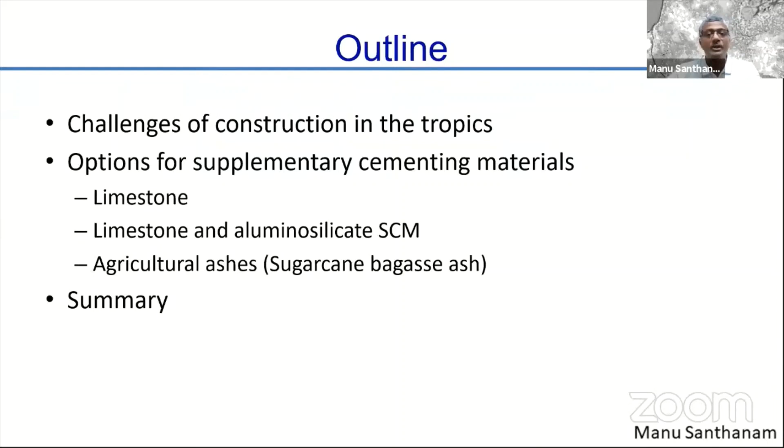The topic for my talk today is future cement solutions for tropical climatic conditions. I'll first talk about the challenges for construction in the tropics, and then focus specifically on supplementary materials that we intend to use to demonstrate how we can effectively utilize available quantities of materials to produce sustainable concrete. Then I'll summarize with key points, since much of the problems are quite similar in India as we have in Africa.

So what are the challenges of construction in the tropics? First and foremost, we are doing construction in very difficult conditions. Most of our countries have high heat and humidity, which pushes up the problems of concreting and also the rate of chemical deterioration.

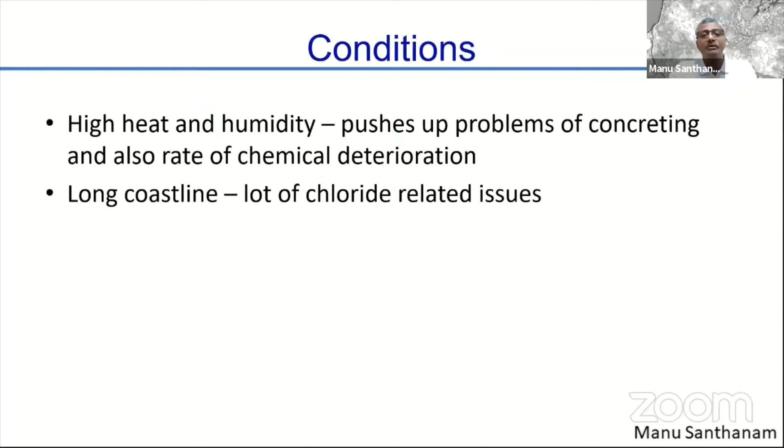We have problems during the concreting process itself, giving us challenges to produce good durable structures. Also, if we have an aggressive environment, the rates of deterioration increase because of this heat and humidity. We also have a long coastline to deal with, resulting in chloride-related issues that dominate the behavior of structures exposed to different service environments.

In terms of materials, there is generally a reluctance to move to blended cementitious systems. We've been doing seminars all across the country for the last 20 years or so, and I have not really seen the same kind of change in mindset that should come after hearing so many people talk about the benefits of blended cements. I believe it's quite similar elsewhere in the world also - not just Africa and India, but in a lot of countries there is reluctance to move to blended cementitious systems.

There is a major problem with the specifications used for construction projects, which are outdated. These are primarily outdated because they don't take into account the advances that have happened in construction materials over the years. There are also quality and consistency issues with site materials, because we don't always succeed in giving very large quantities of consistently good construction products at all job sites.

One of the major issues is that nobody really pays attention to concrete design. If you go to any major construction project, comparing the time taken for design versus construction, very little time is actually spent looking at the concrete mixture to be used, what problems can be envisaged, and how to solve these problems in the real life project.

Unfortunately, more than 90% of site-related problems are because of concrete itself. So if you don't spend enough time to look at the concrete and design it appropriately for a given situation, you're most likely to land up in problems.

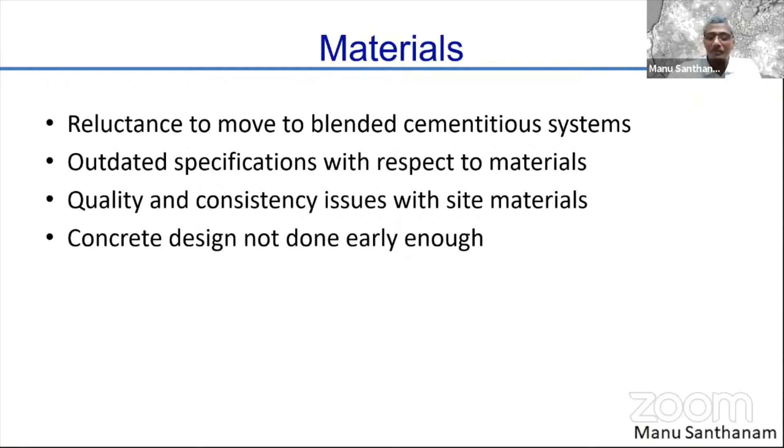As far as construction technology is concerned - I talk about India, but I'm quite sure this is similar in Africa - we have a major lack of skilled workers. We always have this feeling that concrete is an easy material to work with. We leave it to the last line of defense, the last laborer who's actually putting this together, to decide the fate of our concrete.

What's the point of putting together a cover of 75 millimeters in an extreme environment, and then actually you're getting only 7.5 millimeters on site because people have not really paid attention to it? So there are major problems with respect to understanding or giving respect to concrete as a construction material on the job site.

One of the other problems is water addition on the site, which is rampant - it happens all over the place. Even in very high profile construction projects, I've seen instances of poor cube strengths coming out primarily because water was added to the concrete.

Quality checks on sites are quite infrequent. Most often the quality checks are left to foremen and people who don't really understand how concrete should be done and how concrete should be cured.

There is over-reliance on plain cement - all over India, that's a primary problem we have. We can't change the mindset of people to move away from plain cement. The other thing is people are overly relying on the strength of the concrete.

They don't think about anything else but strength. So as long as the cube strengths, or in other countries probably cylinder strengths, are fine, they don't really think about what's actually there in the structure. It's only when there are problems with the lab cured concrete specimens that people start thinking something may have happened to the concrete structure.

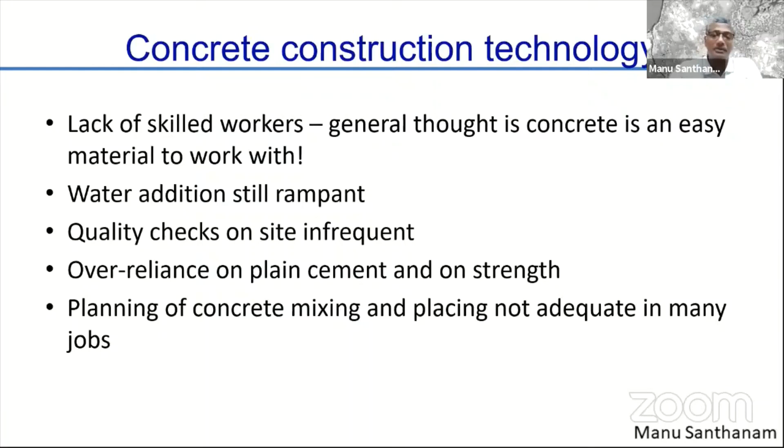So what are the new challenges? When you deal with construction projects in India, and I'm sure the same holds good in Africa, we have entry of international players. Many of our projects are joint ventures with Indian companies getting together with foreign partners. So there's an influx of new specifications, and one needs to start understanding what requirements of concrete are needed to match the specifications for these construction projects.

There are obviously problems of escalating costs of construction, especially in today's world. Things are going haywire with respect to project scheduling and budgeting and all that.

Availability of labor is a big challenge because migrant labor is quite common in construction. We have one construction project where in the first month you have one set of laborers, and very soon they all leave, and then you have to start training laborers afresh. That's a major problem. You don't really get consistency in the material or the quality of construction because people keep changing all the time.

Water is a major problem. Availability of good quality water for construction has been a major issue in India, as I'm sure it has been in Africa, and this will continue to challenge us for a long time to come. In the future, we'll also deal with lack of availability of good quality aggregate for concrete construction, and finally we may start running out of options as far as cementing materials are concerned.

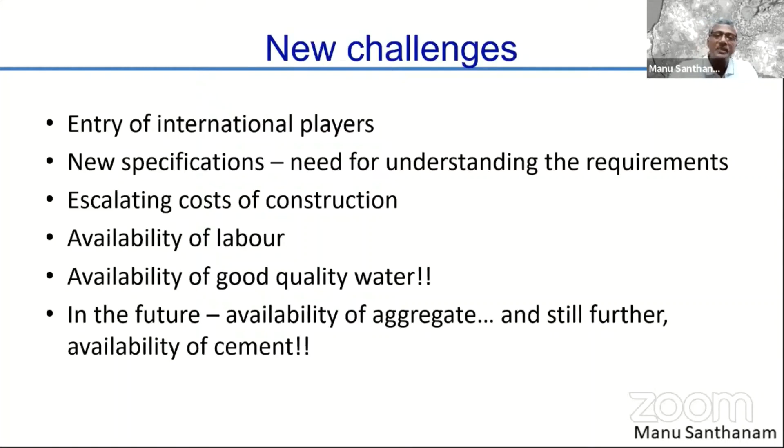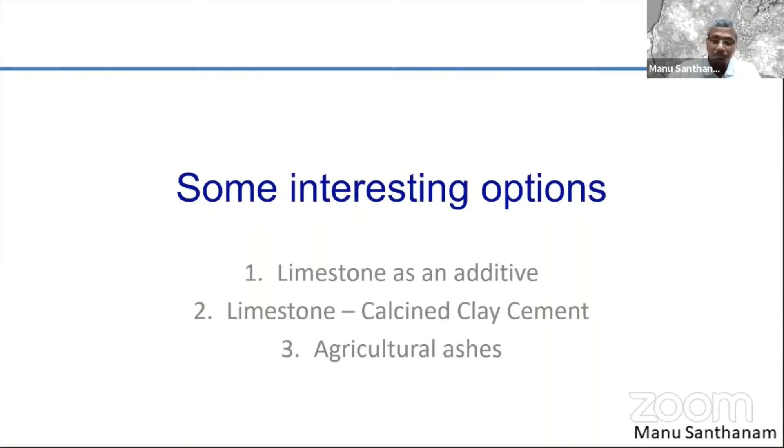Of course, this topic is not new. People have worked on this for years and years. But I'm going to put some light on it from the perspective of what we have been doing at IIT Madras, and it's something happening globally too. So I'll talk first about limestone itself as an additive, then specifically about limestone calcined clay cement, LC3 as it's called elsewhere, and finally agricultural ashes, which Kolobole also talked briefly about in his presentation previously.

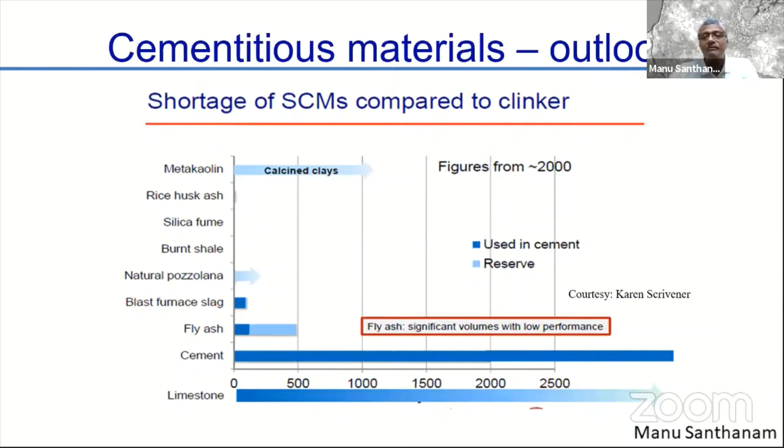But nearly 80% of this limestone is not accessible because it happens to be inside forest lands. Even the ones which cement companies can mine produce a different mixed variety of limestone products. Only certain limestones in these mines are actually suitable directly for cement manufacture, and because of that, there's still a lot of wastage in cement industries.

This can be looked at as an interesting option by looking at finely ground limestone as an additive. Of course, limestone happens to be a global solution because all across the world, people are producing cement, and limestone availability is one of the major factors. If limestone is available, there's a good chance that some of it could be utilized in the ground form as an additive to the cement itself.

Indeed, most of our ordinary Portland cements, plain cements as we call them, still have nearly about 5% of limestone as an additive in a common formulation all across the world. 6 to 20% is permitted in Portland limestone cement blends wherever the standard is applicable. In India, for example, we don't really have a standard yet in Portland limestone cement.

In some other instances, especially with respect to research, people looked at the use of limestone in combination with other supplementary cementing materials, which presents a very unique advantage, and that's what I'll focus on for LC3.

There is also a possibility of using limestone itself in much higher additions, even up to 50%, but you can expect a significant reduction in performance because a lot of this limestone simply sits there as a filler and does not contribute much to reactivity. But it may be suitable for low-grade concretes. Why do we need very high-grade cement to produce concrete blocks, for instance? We can produce it entirely with very high levels of replacement of limestone.

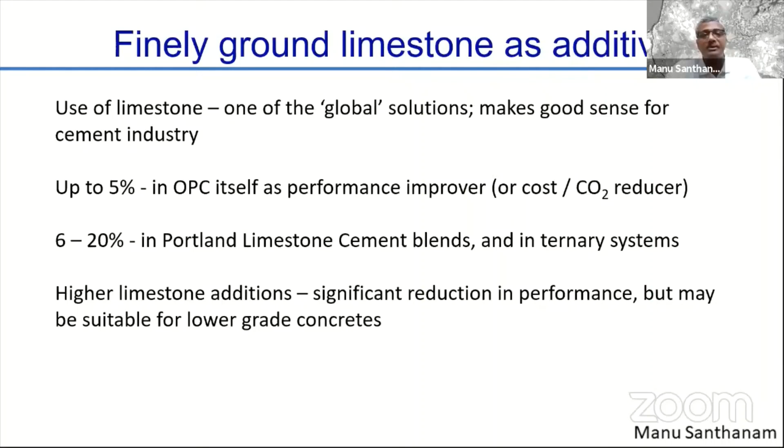Strength is never a problem; we can easily achieve the strength of these blocks. So if you look at limestone in binary systems, that's what I was talking about. As I said, in normal cement it is already used up to 5%, but it's also used in Portland limestone cement blends wherever we have the possibilities as per the standards.

The finely ground limestone, chemistry-wise, accelerates the hydration of your C3S or alite phase, and the carbonate that is contributed from the limestone has a chance to react to some extent with the aluminates that are given from the cementitious systems to produce carboaluminate-based phases.

Now, the interesting part is only a part of this carbonate can actually react because very little limestone itself actually dissolves in the solution to start reaction. As a result, most of the limestone that you add in cement remains as a filler. It needs a good source of reactive alumina to really utilize or harness its potential.

And that's where this limestone calcined clay becomes a highly advantageous proposition. Now, if you go for more than 20% replacement, you do have an opportunity to use much higher levels, up to 50%, as I said, in low-grade concretes without any problems of compromising the strength or long-term performance.

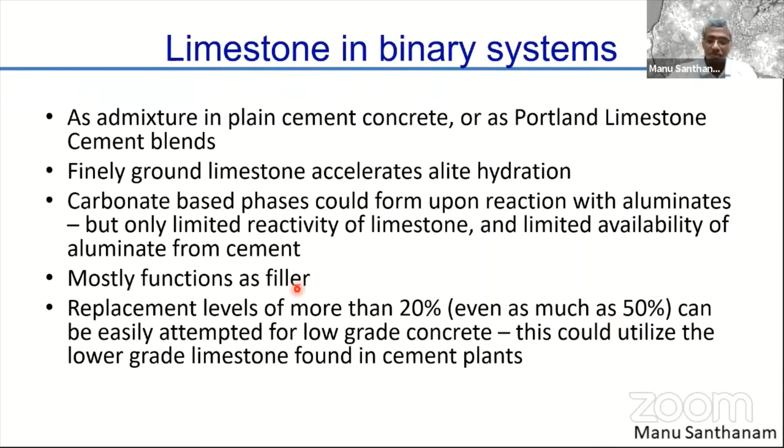Now, as far as the ternary blended system is concerned, that's where we believe limestone can have a major impact when it reacts with the available reactive aluminate from a secondary supplementary cementing material in a cementitious environment. That's when it leads to a very good synergy in a ternary blend and leads to the production of these hydrated phases that are stable and can have a large effect on the strength and durability of the concrete.

Now, if you look at normal cementitious phases, they are typically higher density phases. But when you start replacing cement with alternative materials like limestone plus calcined clay together, you start producing other phases which are lower in density, as you can see from these green phases here. When you start producing phases that are lower in density, you start occupying more volume in the system, and when you occupy more volume, obviously you're causing a reduction in the pores that are present in the system.

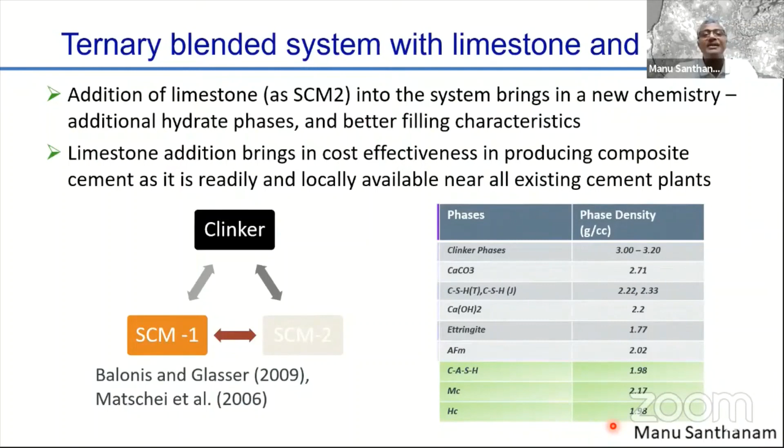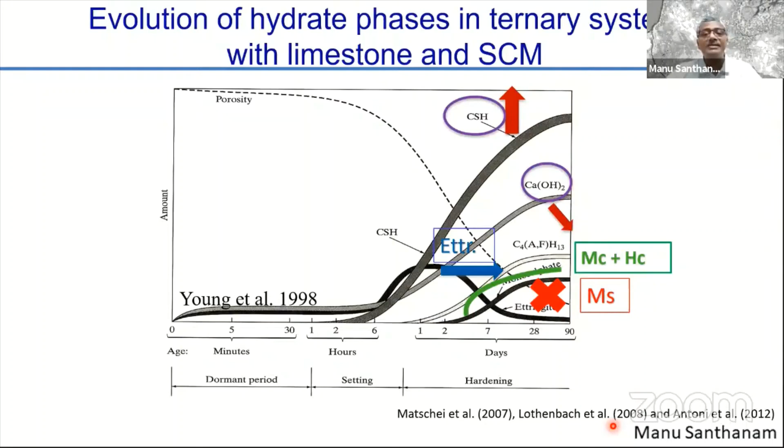This process produces additional phases called monocarbonate and hemicarbonate, which occupy available pore spaces, leading to an overall reduction in calcium hydroxide to produce additional CSH—or in this case, calcium aluminosilicate hydrate, since we are using a pozzolanic material in addition to limestone.

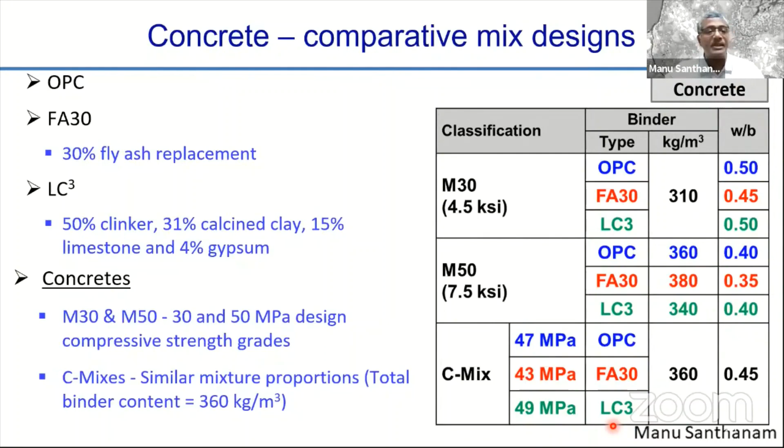Overall, the porosity reduces and the strength and durability are expected to increase. I'll present some results from studies here—there are papers describing these in more detail—so I'll talk quickly to get to the second part of my presentation faster.

If you look at compressive strength development compared to 30% fly ash replaced cement concrete, as well as ordinary Portland cement concrete, there isn't much difference in strength performance. You can actually produce good quality concrete with LC3, comparable to the best quality ordinary Portland cement.

LC3 is better than fly ash with respect to early age strength development. In the long term, there is not much difference in the strength performance.

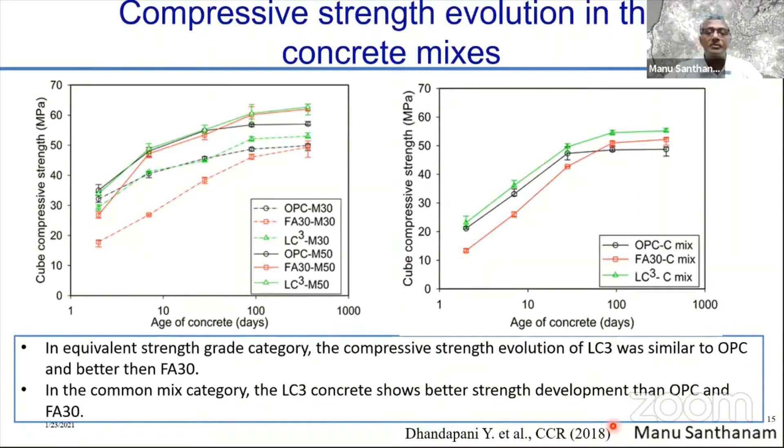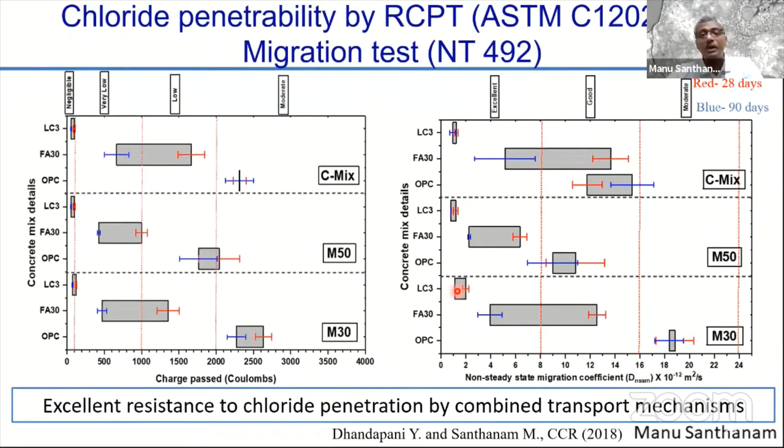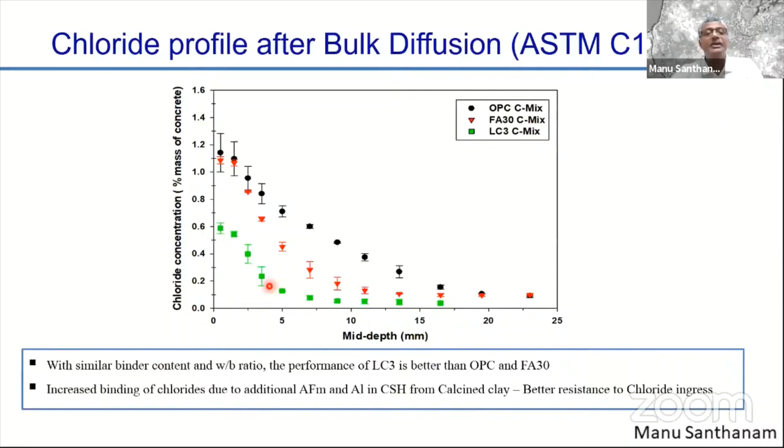In terms of bulk diffusion, again the result is quite favorable. You see the amount of chlorides penetrating OPC related concrete—red indicates fly ash concrete and green is LC3 concrete. So you can see a distinct reduction in chloride penetration characteristics also.

Now, if you look at how concrete behaves in the field, you have to actually cast and cure it in real conditions. So we did slabs with LC3 and cured them outside in the open atmosphere, with only 14 days of normal curing.

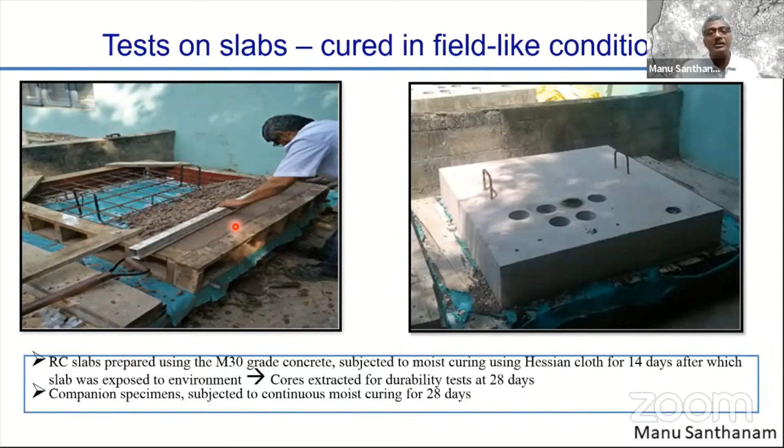This was followed by open curing, and then at 28 days we extracted cores to determine the durability properties and compare them to lab cured specimens, which were cured at 100% humidity. You can see that for LC3, the field and lab specimens are not all that different.

You can see that RCPT, NT test, and oxygen permeability are all producing results of almost the same numbers. Whereas if you consider fly ash based concrete, which was from a parallel study, not the same study—

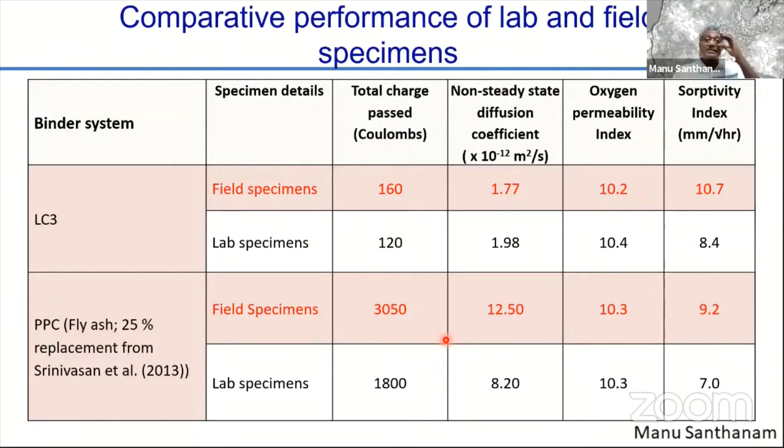you can see that the field specimens depend a lot on the fact that it has not been cured well enough compared to the lab specimens. So you can clearly see the difference in the case of fly ash based concrete. In other words, LC3 based systems are probably less susceptible to the problems of lack of curing in the field.

There are several publications that we have on LC3 from IIT Madras, and of course globally, if you look at the publications that have come out in the last 2 to 3 years, there's been a tremendous abundance of publications in this field.

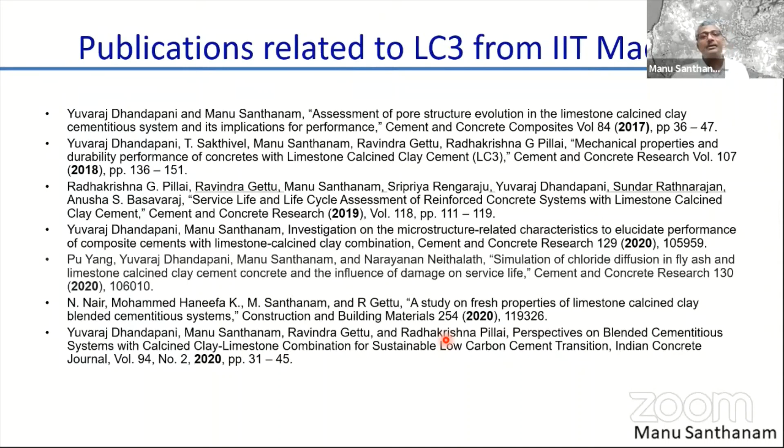The other material I'll talk about, which is quite interesting from a local perspective rather than a global one, is sugarcane bagasse ash.

We know that bagasse is the fiber that remains behind after extracting the juice from sugarcane, and when you burn this, you get ash—that's called sugarcane bagasse ash.

A lot of the research around the world in sugarcane bagasse ash (SCBA) started off in Brazil, but in India also now we have a good bit of publications that deal with sugarcane bagasse ash.

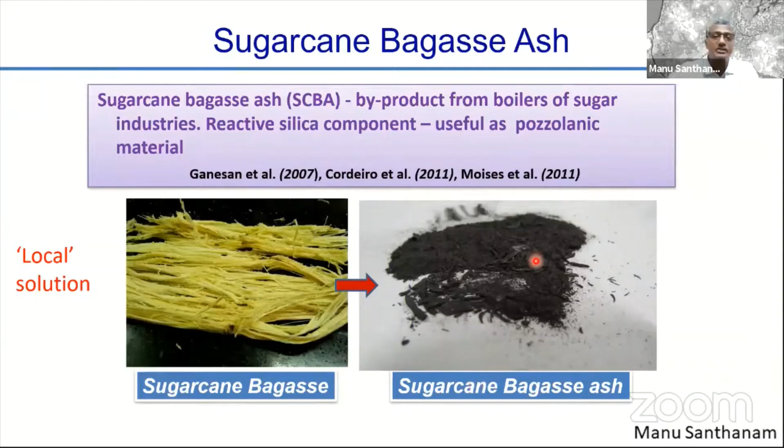So why do we need this material, what is its importance? As you can see, India is the second largest producer of sugarcane. Because of this, you also have the aspect of dealing with the bagasse ash, since all of this bagasse in sugarcane plants is actually burnt. Why is it burnt? Because it has a good calorific value and they can use the heat for other purposes, and also for electricity generation these days.

So we have nearly 67,000 tons per day of bagasse ash that is simply dumped. Much of this is in states in the southern part of the country, and also Uttar Pradesh and Punjab in the north. So you have local availability of this material, and in many instances it works out quite favorable to the use of fly ash for the production of blended cement.

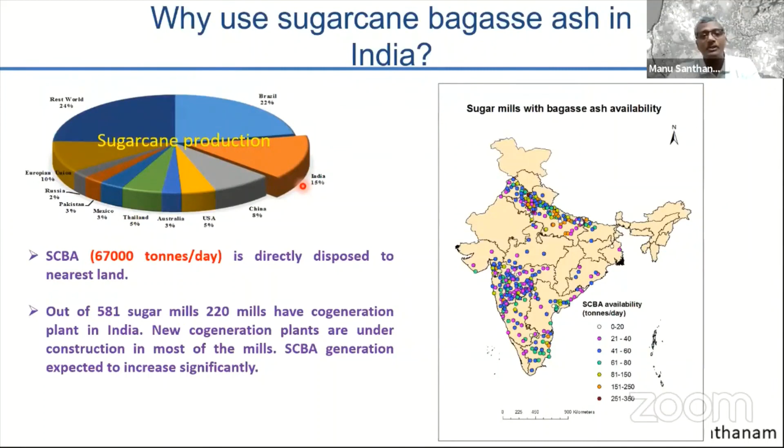But then we need to be convinced about its properties. So we undertook a large research investigation and looked at its physical, chemical, and mineralogical characteristics.

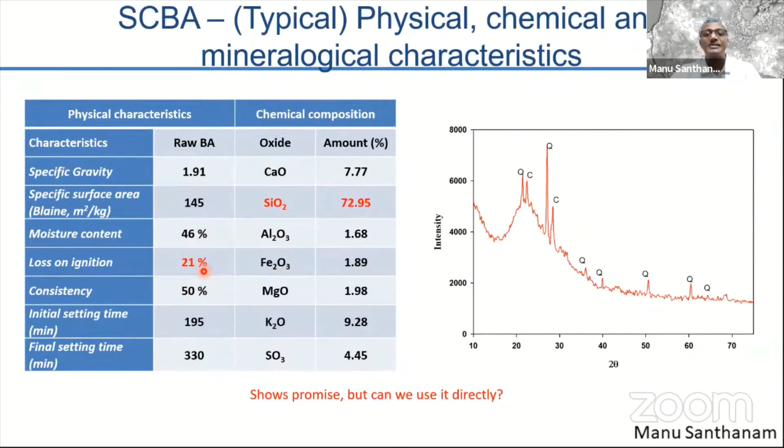So can we use it directly? The answer is no. If you want to use it as a cementitious material, you need to process it.

If you really look at the microstructure, you can see all kinds of stuff in this bagasse ash. What we want are these irregular shaped silica particles. But we also have these prismatic particles of silica, presumably crystalline, and we also have fibrous particles which are the remnant carbon from the bagasse that has remained behind.

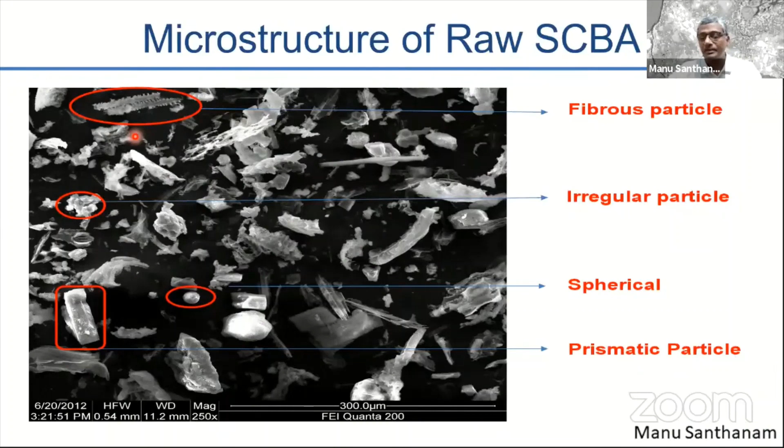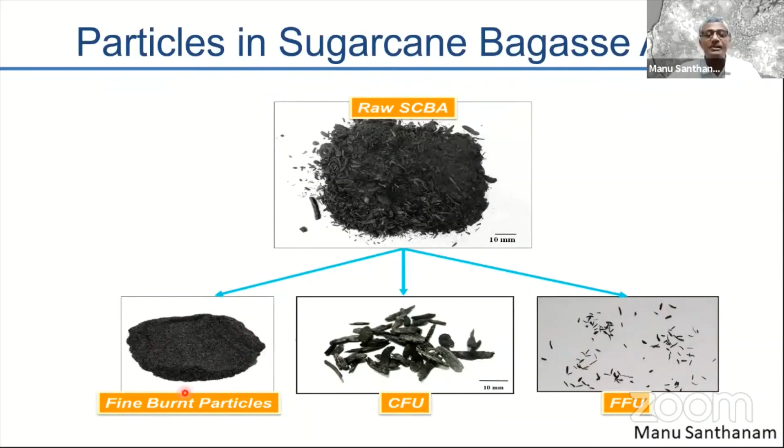So we need to develop a technique that can effectively get rid of this carbon and maximize the amount of silica we have. So we looked at the composition here. You could see there are coarse fibrous particles and fine fibrous particles that are impurities in this otherwise very nicely fine burnt siliceous material.

So what we did was undertake a large scale of processing studies, either grinding it, heating it, or sieving it and then grinding it, and combinations of these studies. What we found was the best pozzolanic activity was achieved by the material that was sieved through a 300 micron sieve, which removed most of the carbon bearing materials, and then ground to the fineness of cement.

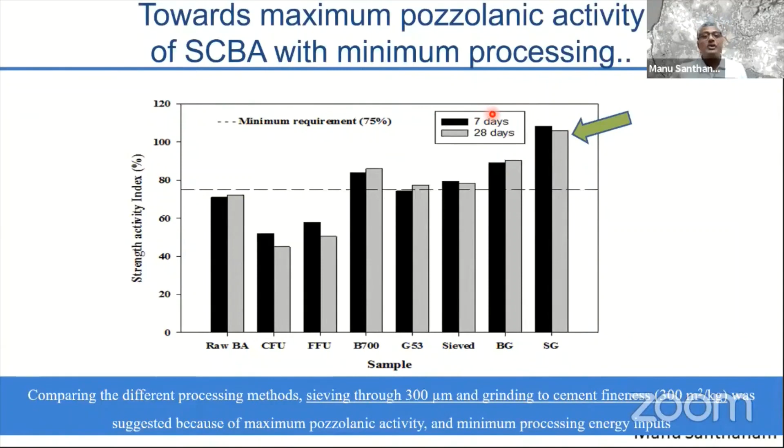So it's almost like you're just taking this bagasse ash, collecting it from the site, drying it to get rid of the moisture, sieving it through a 300 micron sieve, and then putting it in the ball mill where the cement clinker is being ground. You grind it to the same size as the cement, and you end up with a pozzolanic activity that is more than 100%, even at 7 days. That indicates you have a highly reactive material once you get rid of the carbon.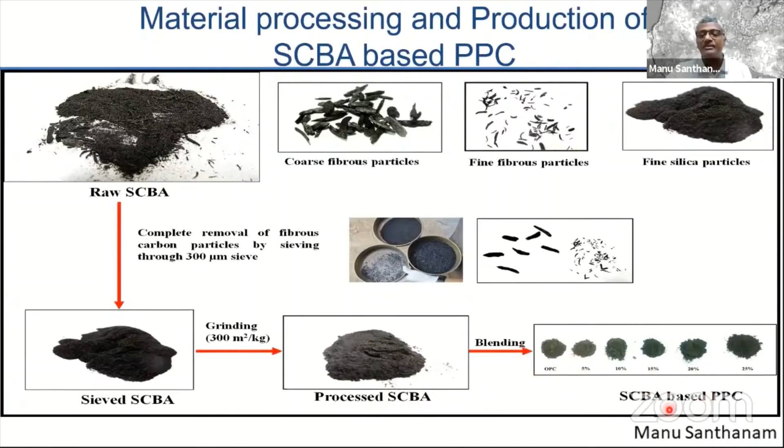So here, this is again the process we talked about: removal of the fibrous particles, sieved bagasse ash was ground with the cement to produce the processed bagasse ash, and then it was blended in various proportions to make bagasse ash based Portland pozzolan cement.

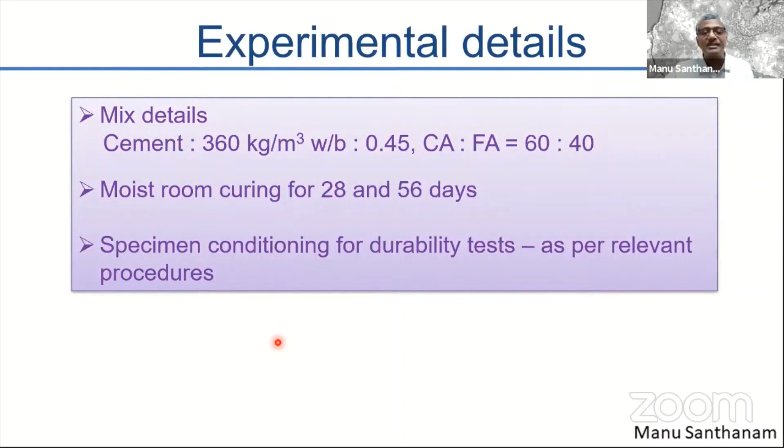So here we looked at concrete properties for a typical concrete design we have been doing. We did curing for 28 and 56 days, and we performed several different durability tests.

I'll talk quickly about the results. The compressive strengths, of course, are not much different irrespective of the degree of replacement of the bagasse ash. So more or less you have consistent performance.

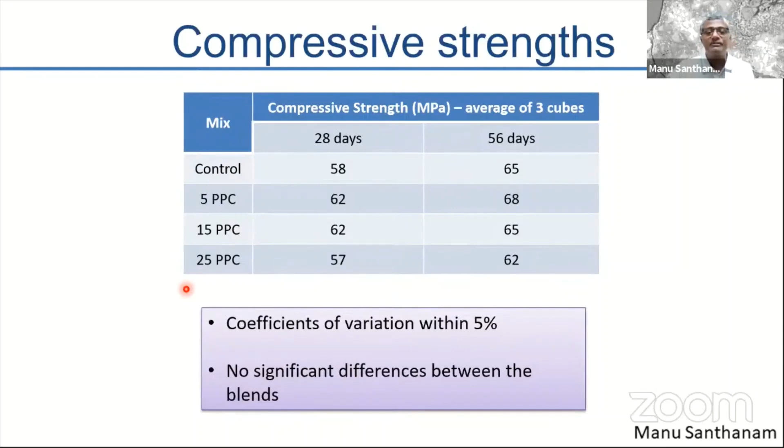We did several different durability tests: chloride related, water related, and gas related. You can see some specimens that I prepared. Somebody had talked previously about the color of the concrete. So here you can look at the color of concrete with bagasse ash - it's looking very dark.

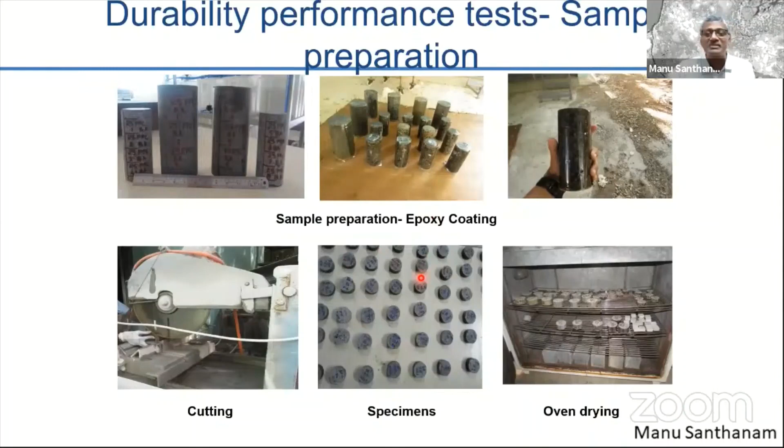Interestingly, in the south of India, people believe that if you have a darker concrete, it implies there's more cement in it—so that's one advantage. But I've heard the situation in Europe is quite different, where they say concrete surfaces have to be as white as possible. The perspectives differ in different parts of the world, so you need to play for the advantage you get.

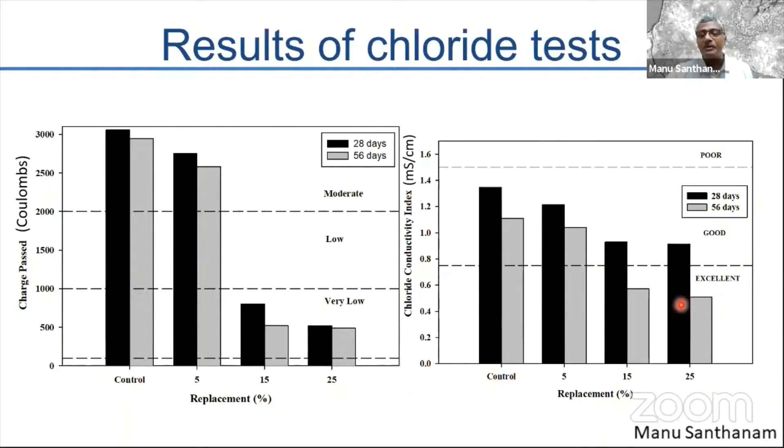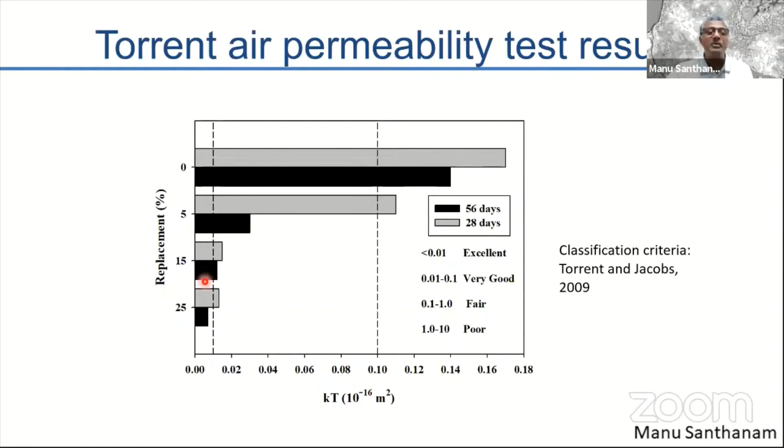Here you can see the results of chloride tests. The RCPT is significantly lowered when you have higher replacement levels of bagasse ash. The chloride conductivity index with the South African method again produces much better quality concrete with bagasse ash rather than plain Portland cement. The oxygen permeability index is also enhanced with bagasse ash replacement, and the air permeability as per the Torrent measurement shows the permeability index reduced significantly compared to plain Portland cement.

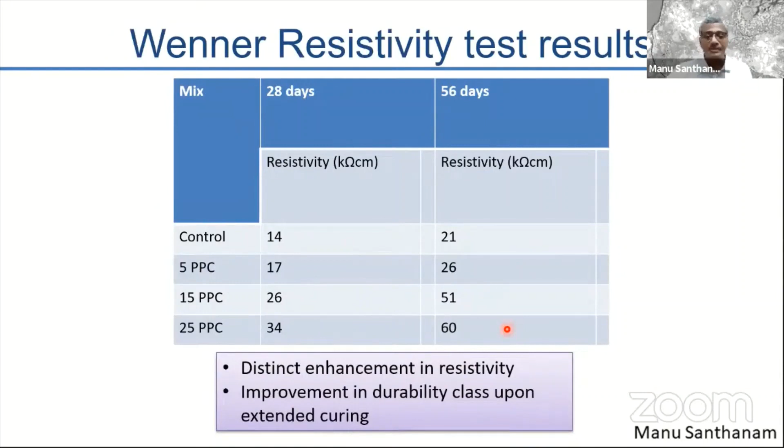Resistivity also shows enhancement, meaning you'll have much better performance as far as corrosion is concerned. Water penetration is also significantly reduced when you replace cement with bagasse ash.

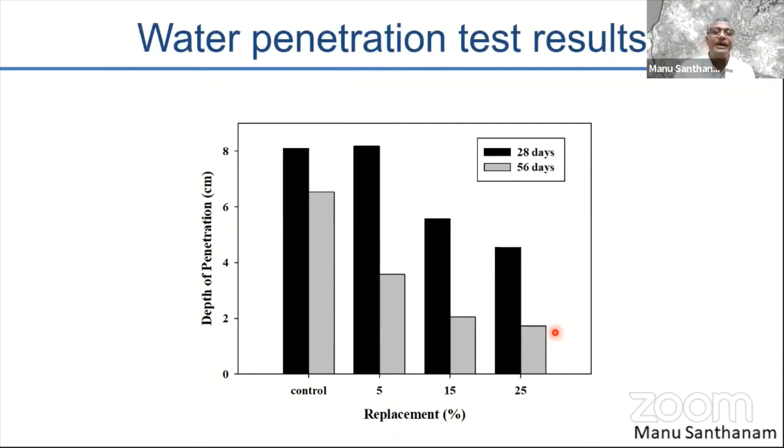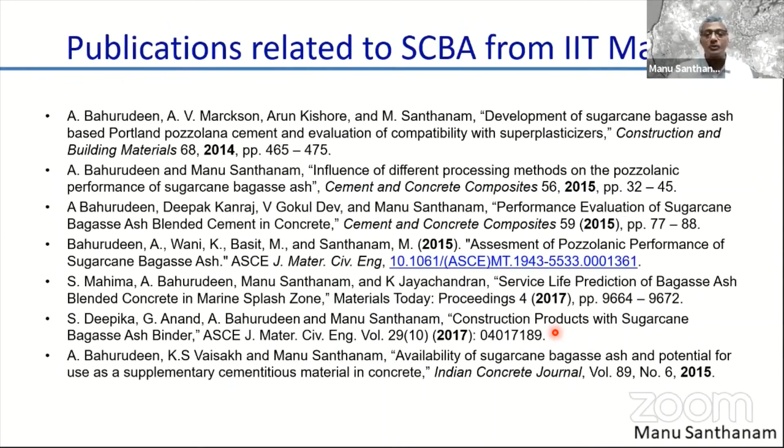All this is indicative of the fact that you produce a material capable of reacting and also functioning as a filler, which overall reduces porosity and permeability, resulting in a much better microstructure of the concrete. We have several publications on bagasse ash—you'll have a copy of this presentation to see which paper you'd like to read and learn further about.

To round up the new challenges of these supplementary materials: one major challenge is how to estimate the available amounts, and a lot of effort is needed there. We need to map these locations, how much material is available, and how far it is from the point of nearby use, because ultimately everything matters—transportation really matters.

Next, we need to decide on the processing strategy. Can we actually use the material as such? If not, what's the minimum level of processing needed to make it suitable as a cement replacement? We need to assess the cost and justify it in the overall concreting process, and establish the performance in different types of concrete.

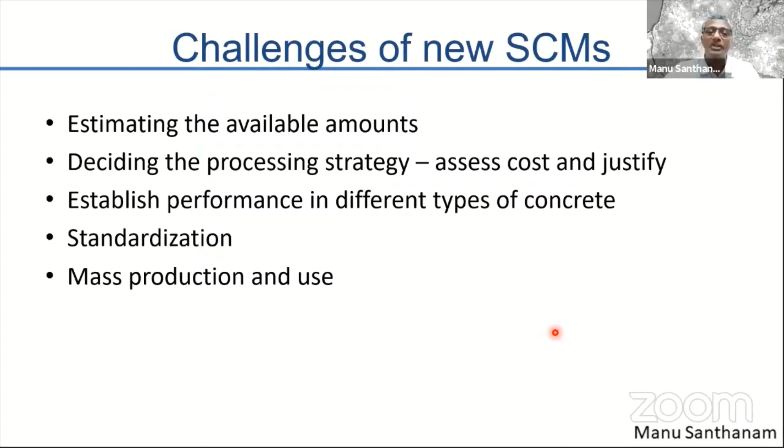This has to happen globally for several different kinds of materials, and finally these have to appear in the standards. Even if people start using alternative products, they first look at whether it's in the standards. Even when standards aren't meant to be the guideline specification for a job, people still tend to simply believe whatever the standard gives them and not go much beyond that. And finally, of course, mass production and use of these SCMs.

To summarize, binder choices offer a range of solutions for OPC replacement. These could be global, applied all over the world, or local, where you have to be more careful with the kind of material you have and determine carefully the proximity to the nearest cement manufacturing unit. We need policies and incentives to promote the use of blended materials.

Otherwise they'll simply not make it anywhere. Sugarcane bagasse ash, for instance—unless there's a strong policy driving that any bagasse ash generated at a sugarcane plant has to be utilized up to a certain percentage in cementitious products, nobody's going to use it. Why would people bother changing their already established methods of practice?

Processing is often a challenge, and that's something we need to pay a lot of attention to. For that, we need to do a sustainability impact assessment, including environmental and ecological aspects, and bring that to light much better. Impact on concrete has to be locally established before large-scale use of these materials, because what's good in one concrete may not be good in another, and what's good in one area may not work in another. We need to be very clear about developing local solutions.